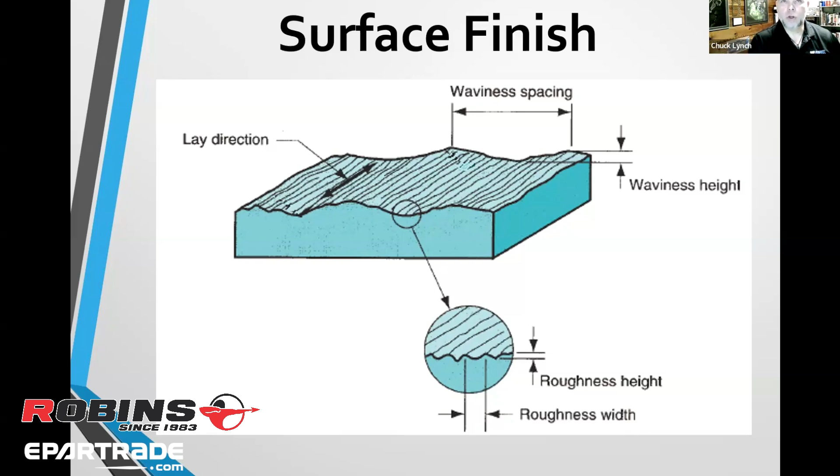So can you go ahead and advance, Anthony? Back one. There. Yeah.

So these are some stylus types. So roughness can be measured with a skidded profilometer. Waviness can only be measured with a skidless profilometer. So if you look at the stylus that actually contacts the surface, that's a really good indicator of what we're looking at as far as skidless versus skidded.

The skidless, if you'll back up one slide, you will see the drive unit has to be supported too. It cannot lay on the surface that you're measuring. So the drive unit and the stylus are going to be different to be able to measure waviness. So let's go ahead and advance to

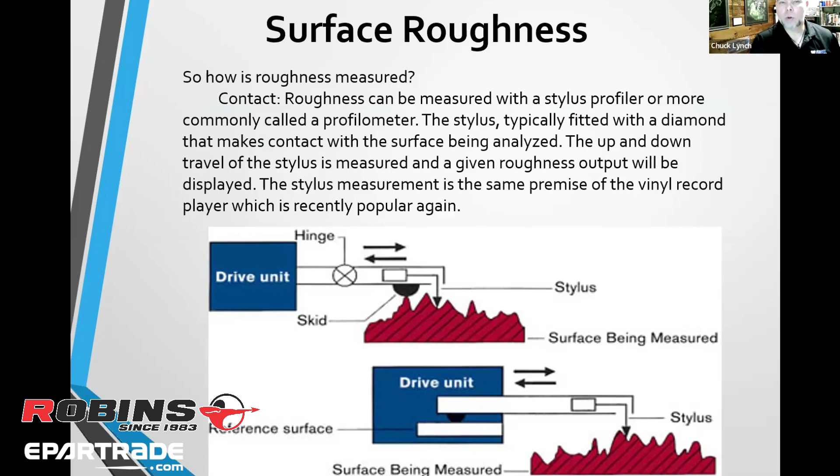why it matters. The flatness is the ability for the gasket to meet the surface, and cold seal materials can only stand up to so much. So if I have a truly out of flat surface, it doesn't matter how much high tack or copper coat or whatever, if combustion gases can squeeze through there, it's going to ultimately blow that stuff out.

Now, in the drag race world, when you take the stuff apart a lot, you can deal with it. But when it comes to longevity, then you really have to address the issue of waviness. So let's go ahead another slide.

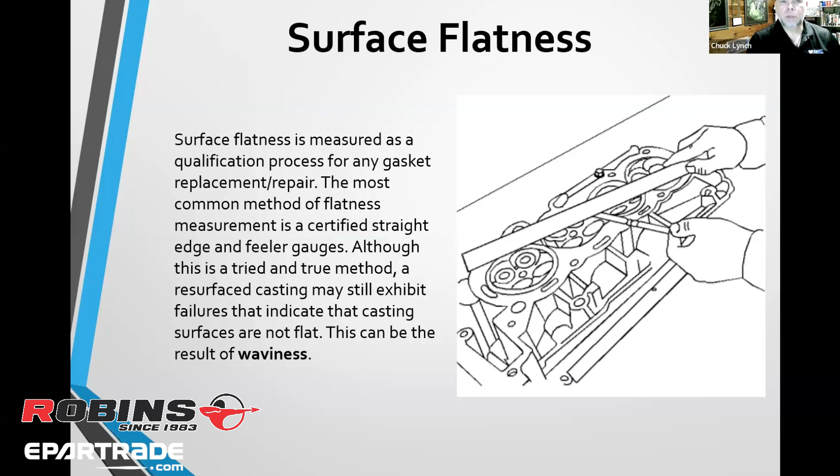Roughness, again, the cold sealability is one of the biggest issues that you're dealing with. We used to want a little bit of grip and bite in the gaskets, but most of the OE stuff now and racing with MLS, you can be really pretty slick. And you'll ask, can you be too slick?

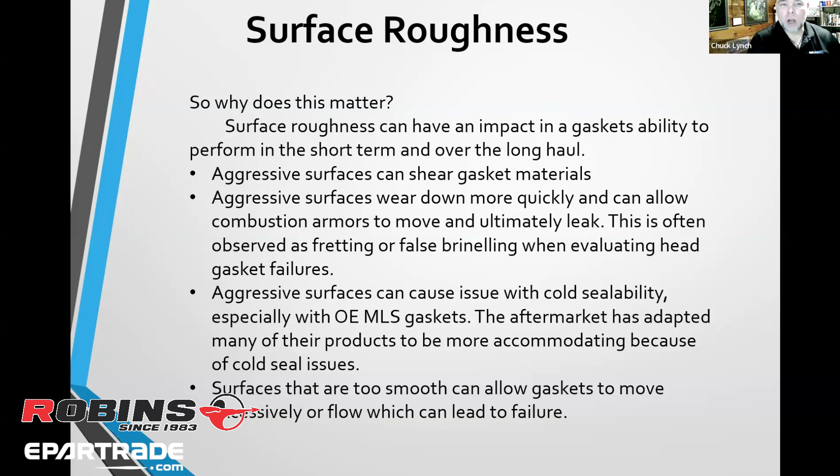We won't take enough time to get too slick because you have to do some polishing and lapping, and that's just not going to happen in most of our machine shops. So you don't really have to worry about getting too slick.

Sorry. If you back up that one slide, we're... Sorry, Chuck. There we go. Here. Yeah.

So that kind of gives you a little bit of an idea of what the gasket would be seeing versus roughness. So all of the up and down little peaks and valleys is your roughness. But if you look at the red line, that's usually what generates waviness, the equipment.

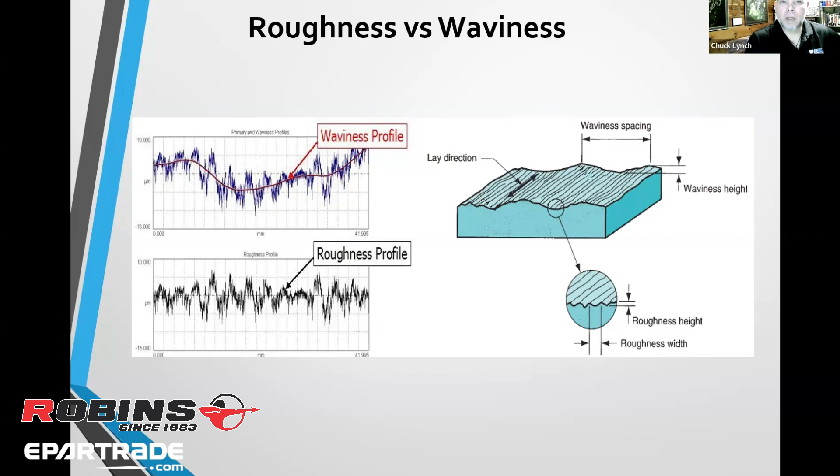It's the rigidity of holding the part. Maybe it's bearings in the machine or something of that nature. So it's a whole different thing than just your cutting insert. Go ahead and advance and kind of remember this.

Mark Malburg from Digital Metrology shared this. Sorry, I don't see his logo on there; it got covered with the formatting of the slide. But basically, at the dimension of your thumbnail or fingernail, if you can see stripes, that's waviness. That's not roughness. So that's very, very important.

I've seen a lot of shops where you can see a head laying on a bench and it looks like it's a rainbow. So if that's the situation, you need to look closer and see if you're seeing those indicated stripes, and that's going to be waviness. So you need to make some adjustments to take that out.

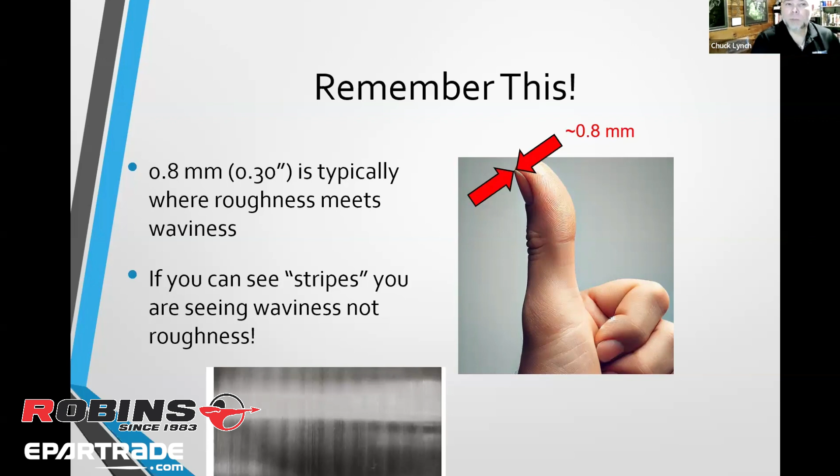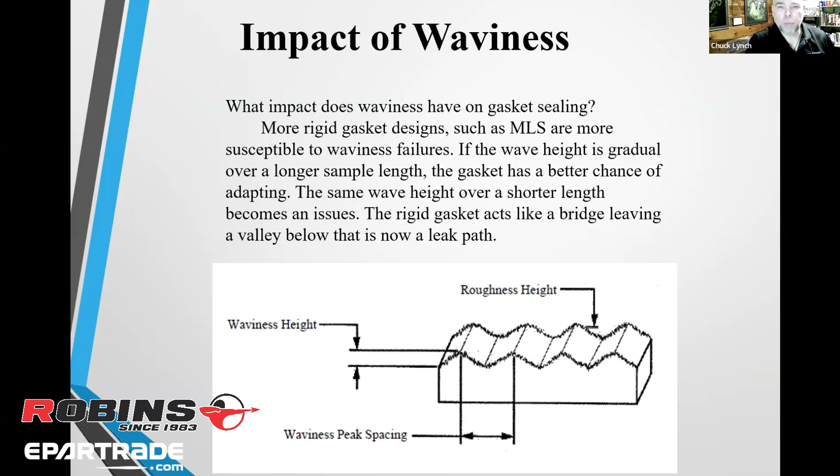Impacts of waviness: again, I always say try to think of it as like the suspension bridge. That metal gasket is not going to go down into those areas and fill that void. So now it looks like a suspension bridge and you have a leak path underneath of it. Again, those polymers may not leak water, but it's ultimately going to leak combustion, because combustion forces are too high and they will push that stuff out over time.

So, factors that can impact your roughness and waviness. PCD works terrific for aluminum, but will fail quickly on iron. So buying the right tooling gets expensive, but we definitely should try to use PCD on aluminum because it does work so much better. CBN can work for both cast iron and aluminum, but as I was talking about, some of the high nickel materials will stick to the carbide cutting insert. You will see the same thing. The aluminum will bond itself to the CBN and then it starts to smear. So you lose your edge condition.

The choice of edge prep: you can have dead sharp inserts, you can have lands, A land, T land, a soft hone edge prep, or whatever. All of that can impact your surface finish as well. The sharper, the better, but your inserts don't last as long. So that's why people will go with things like an edge prep. Machine setup, to include level, secure feet, head clamping, the X-axis conditions, your gibs and ways, the drive motors, lead screws and bearings. Machine condition is super important.

And one of the things that we see in the automotive machine stuff is when we mill head surfaces, they're not 100% flat anyway, because we tilt the cutter head so that we don't create back cutting. If you have an excessive cut, you put a cup in the gasket surface. So usually that spec's going to be 1 to 3 thousandths tilt over the length of the fly cutter. If you're beyond 3 thousandths, you're starting to get to the point where you could potentially cause gasket sealing issues. We don't measure long enough with a profilometer to see something like that, even if we were measuring for waviness. So that's something to check on your machines and make sure that you maintain that.

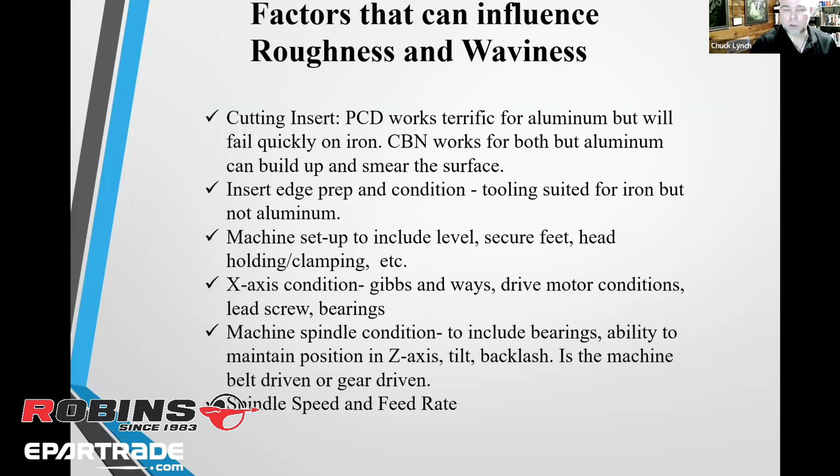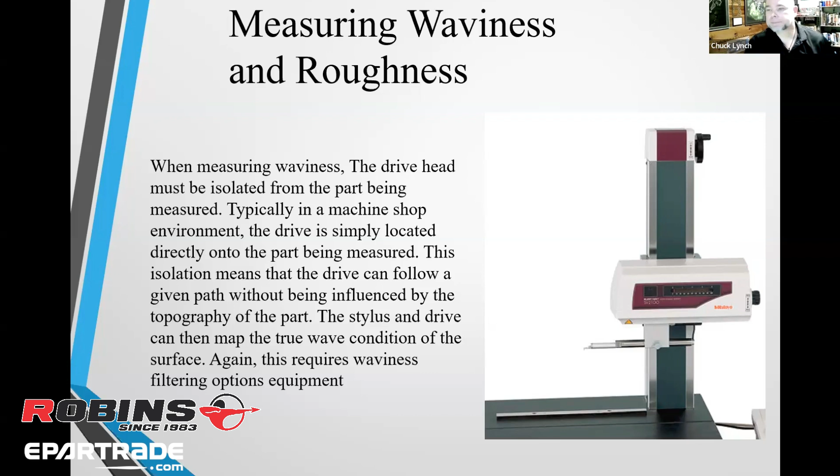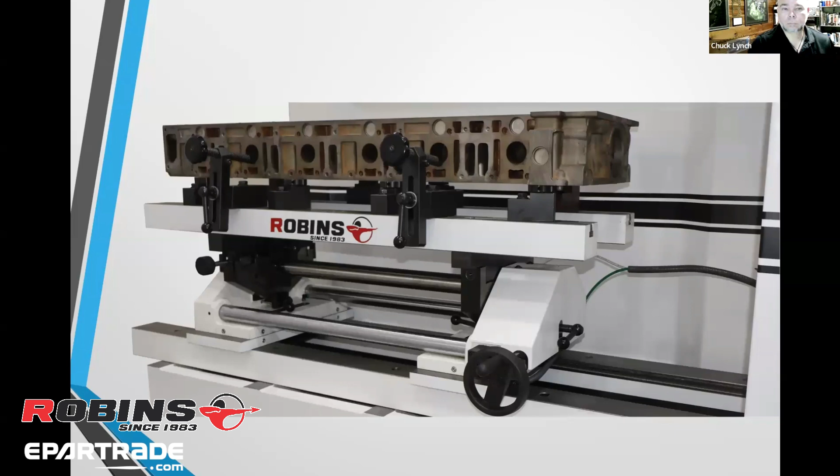So just to finish off this section, this is an example of a modern technology surfacing machine. This machine has been developed with specific bearings and spindle design and precision ball screws and thrust bearings so that factors like waviness are very, very small, very accurate. And as Chuck mentioned, the setting up of the cylinder heads. This is a close-up picture of a fixture, and you can see the number of supports and clamps to hold the cylinder head rigidly for machining.